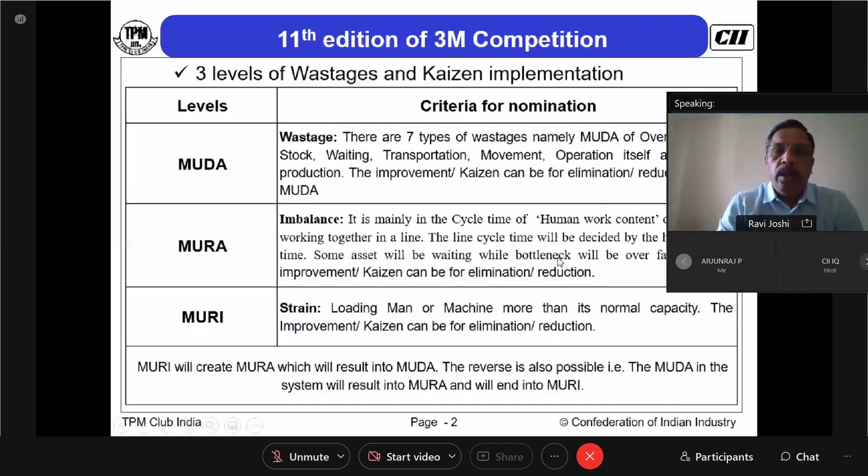As you all know, these are the three levels of the 3M, that is Muda, Mura, and Muri. The definitions of each, I need not read out because I know you are well prepared and have come across them already.

The seven types of Muda will add a lot of value to any industry. Mura looks into the incredible way of trying to balance things. Muri is going to really help the man and the machine eliminate unwanted things.

With this brief description of the three M's, I'm sure that by the end of the first and second day, lot many new definitions and meanings will get added through this presentation, through two days of interaction by various industries. Let's wait and look at how each one of us defines these and takes the journey in our industries.

Coming to the competition, we have totally 66 teams that are going to participate. It's important for you to perform well in the coming two days because it's a tough competition in each category. Under Muda we have 31 teams, under Mura we have 7 teams, and under Muri we have 24 teams.

The IT sector, which has been very competitive, supportive, and involved in these things over the last one and a half years, has seen instant growth in entries into the Kaizen competitions, circle competitions, and 3M competitions. This also tells us that the IT sector and service sector are looking at how to implement these technical tools in their organizations to improve and eliminate the unwanted.

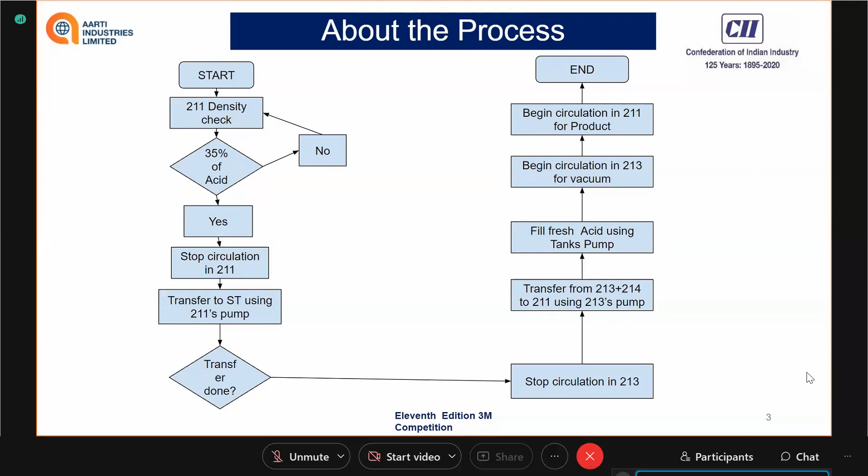Gases are scrubbed from 211 to 214 in series. Two times of transferring is done from 212 to 211 after emptying 211 into the storage tank. After transferring 212 to 211, we do not transfer it a third time due to our observation that nitric impurities in the gases remain unscrubbed and pass on to the further water scrubbers, which ruins our specification limits. The reason behind this high concentration in the water scrubber is saturation of liquid in 214. So we transferred 213 and 214 material to 211, due to which our vacuum got disrupted, resulting in a process downtime of 2 hours.

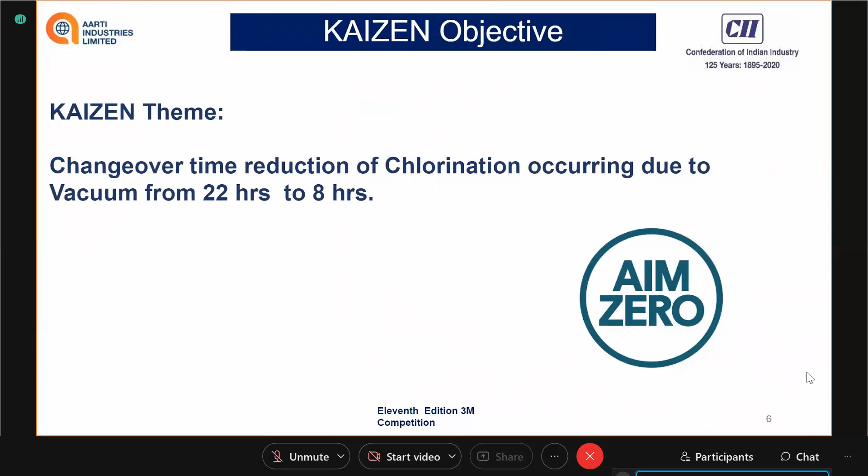From 22 hours monthly to 8 hours monthly, and we are aiming to make it 0. Our target timeline: our benchmark was 22 hours monthly downtime, and now our target is 8 hours monthly downtime reduction. Our team leader is Mr. Sanjay KP, myself as facilitator Shubham Chaturvedi, team members Mr. Gajanan Mugle, Mr. Sandeep K. Acharya, and Mr. Pulkit Narang. Our Kaizen start date was 22nd of March and Kaizen end date was 30th of September, with accomplishment of 2 trials.

Due to transferring of material from 212 twice, and 213 and 214 to 211 once - why? To avoid nitric formation in the scrubber by eliminating transfer from 214, as 214 is at the last stage of the process. So here we got the root cause, by doing the 5 Why analysis, that 214 gets saturated.

This is due to the process performed at earlier 2 stages due to the circulations. So we did brainstorming with the team and generated 4 ideas, out of which we opted for the second one.

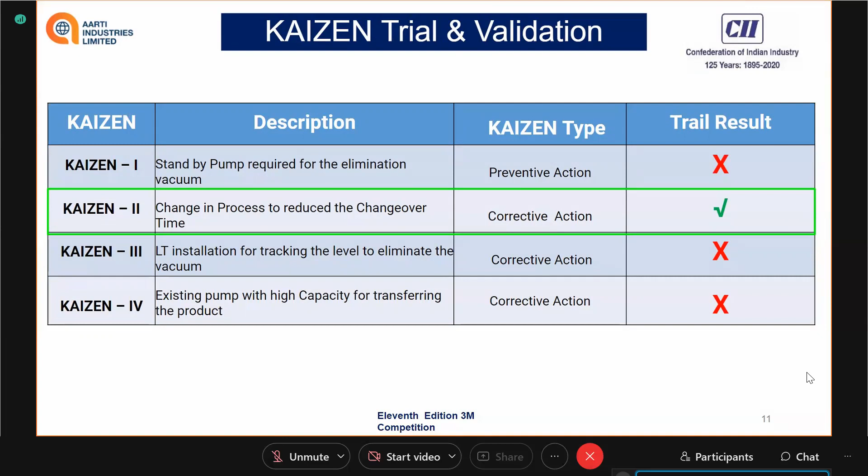Now we are transferring the product from 212 plus 214 to 211 seven times, and then from 213 to 211 once. Earlier we used to have a downtime after 3 product transfers, which we now get after 8 days. Meaning every 3 days we used to have 2 hours of downtime, and after implementation of Kaizen, now we have a downtime of 2 hours after 8 days.

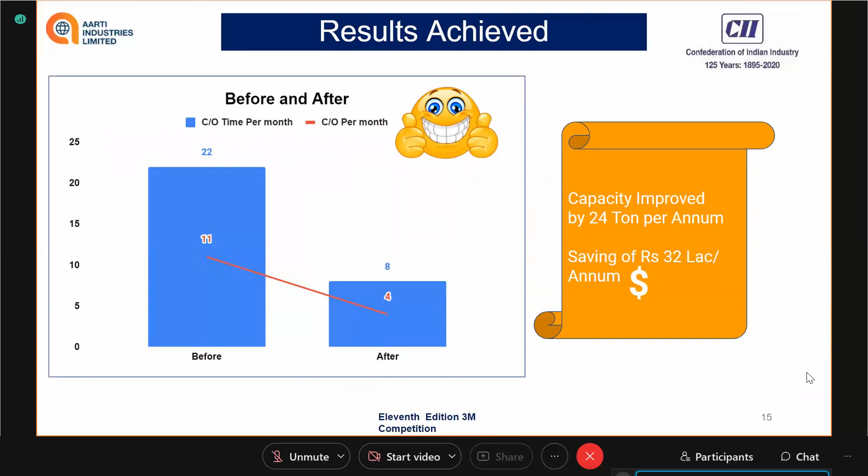Here you can see in the graph also - earlier we used to have a changeover frequency of 11. After implementation of Kaizen, now we have a changeover frequency of 4, contributing to 8 hours of downtime. In terms of monetary benefit, we have saved 32 lakhs rupees per annum, and our capacity enhanced as changeover downtime reduced from 22 hours monthly to 8 hours monthly, which is nearly 24 tons per annum.

Benefits in terms of PQCDSM: productivity increased by 24 tons per year, quality remains same, cost improved with 32 lakhs rupees saving per annum. Our delivery, measured by OTIF, improved as our capacity enhanced. Safety improved as changeover frequency reduced, and since we handle harmful chemicals, fewer touch points means more safety. Employee morale improved as their effort reduced due to changeover frequency reduction.

For sustainability, we have deployed a 1-point lesson, revised the SOP, and we are tracking in the log sheet and SAP data. But we are not able to disclose this because of the Aarti management system - we cannot reveal the product or documents on the common platform.

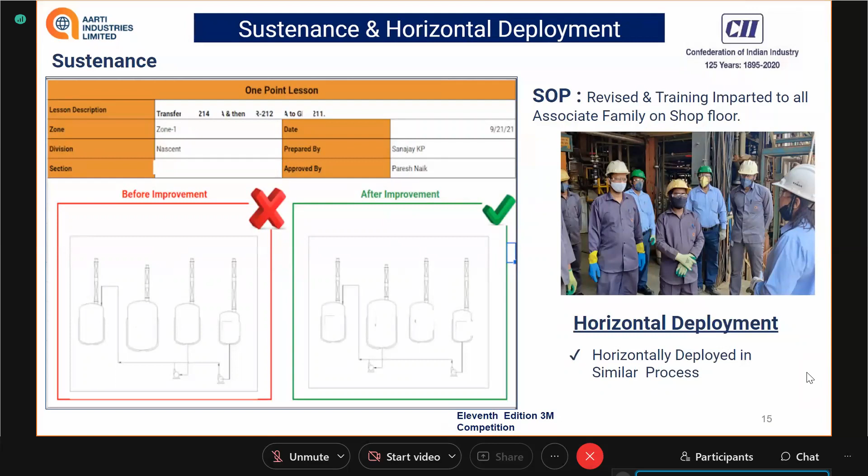Parallelly, we have horizontally deployed the same process in Zone 2 and Zone 3. In Zone 2 we have successfully accomplished the target, and in Zone 3 it is still going on. Here you can see the Kaizen sheet which we have submitted for participation.

There is a good saying by Mr. Taiichi Ohno: progress cannot be generated when we are satisfied with existing situations. So that's all from us. Welcome for the questions, thank you.

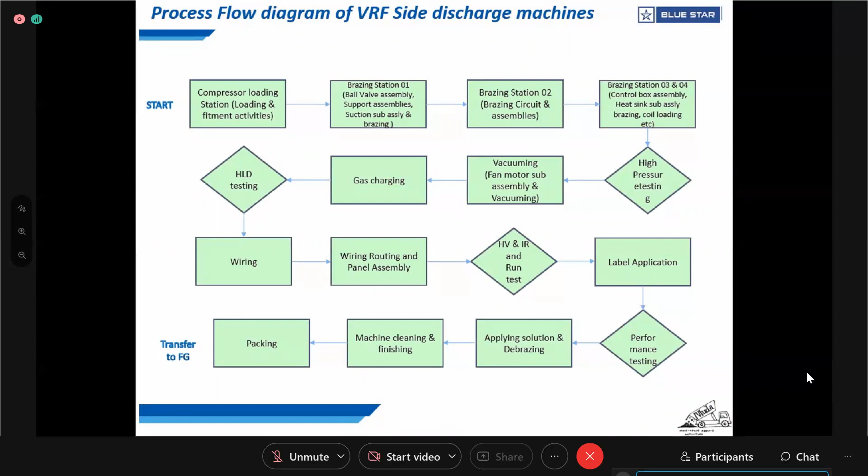Let's discuss the process flow of our product. It starts from machine chassis loading with a compressor at the loading station, then it goes to the brazing station where the HVAC components and related parts are brazed together in a closed circuit group. Next, it goes for leak test and gas charging, followed by wiring and safety test, and finally it completes with the final performance testing and packaging.

Let's discuss our case study. In Dadra plant, one of our assembly lines manufactures the VRF side discharge product, which can be seen here. We have capacity from 4 HP to 16 HP. It is a growing product in its category, and the demand is very high.

So it was very important for us to improve the cycle time and eliminate wastage from the assembly line. The main constraint we were getting from this product was delay in delivery, and because of that, higher SFGs and higher raw materials were getting piled up at assembly lines. We were also getting internal quality issues like wrong component fitment and wrong sticker fitment.

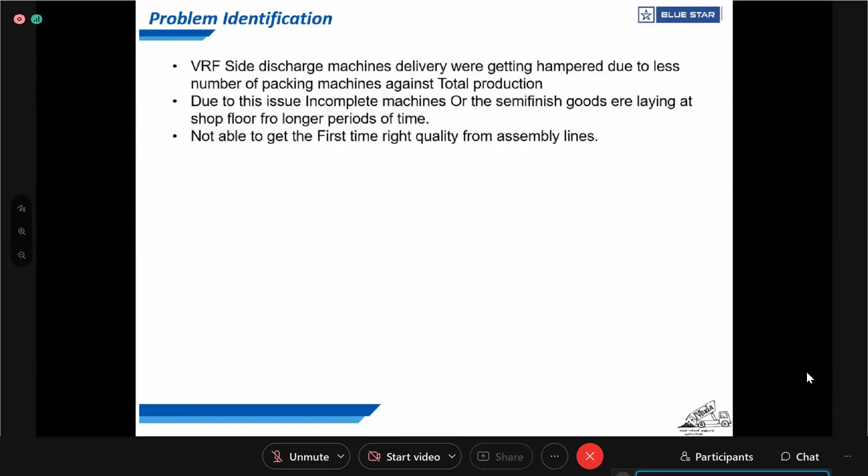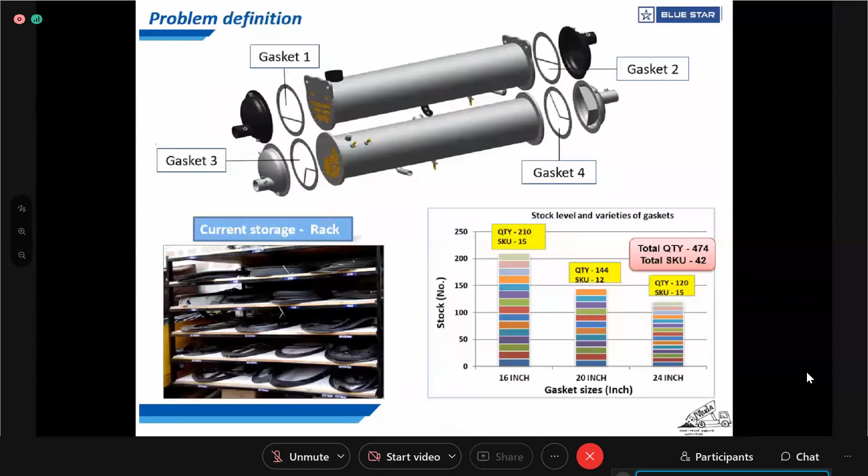The root cause analysis showed that this station needed a time study. So we did a time study on this particular station, and that gave us the opportunity to do Gemba and brainstorming at that station, and we found a few very good ideas about what we could do.

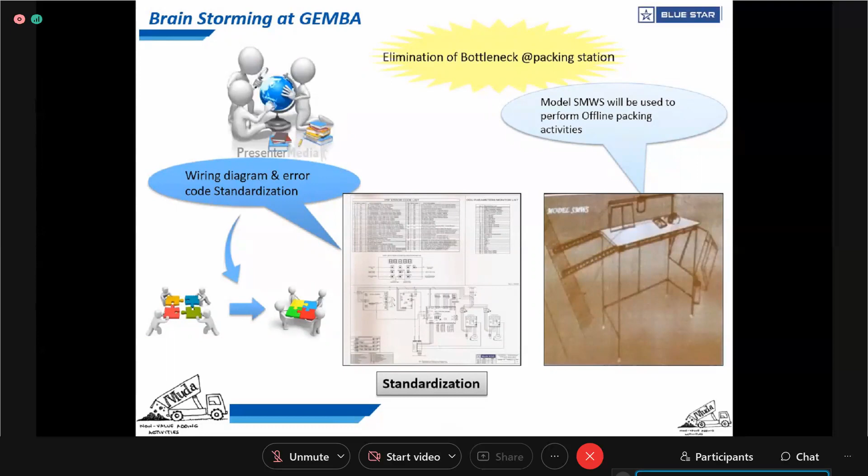We got a very good idea like standardization of stickers and wiring diagrams, and the SMWS concept, which is the major finding from this project. We were able to use this concept, which we learned from our industrial benchmarking visit at Paragon Industry, where they were suffering losses on their assembly lines and introduced the single man workstation. I will explain what it is.

In that particular station, a single operator will do all the offline activities and supply all the parts at the point of use. So in Blue Star, at the packing station, our operator started to complete all pre-SFGs and directly supply them to the packing station, so that the other activities could be catered to at that station.

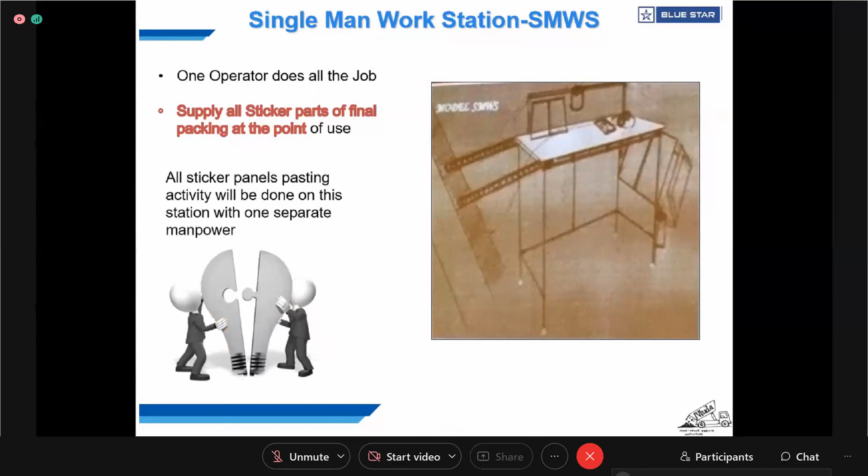Similarly, we also standardized the wiring diagram and error code. Earlier, we were receiving this diagram on 2-3 A3 papers, so we proposed a design change where these two stickers could be clubbed together. We got approval from the service team that they would not have any issue reading this diagram and error codes from a service point of view.

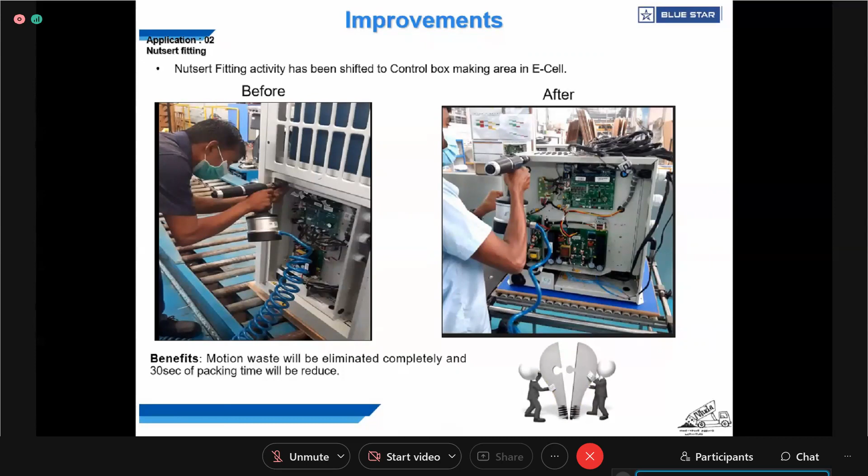We also saw that panel fitment activities were part of the packing station, so we shifted that nutsert fitting activity to the control box making area near the packing station in Blue Star. This shift saved around 30 seconds of packing time. This is one of our safest Kaizens, I would say.

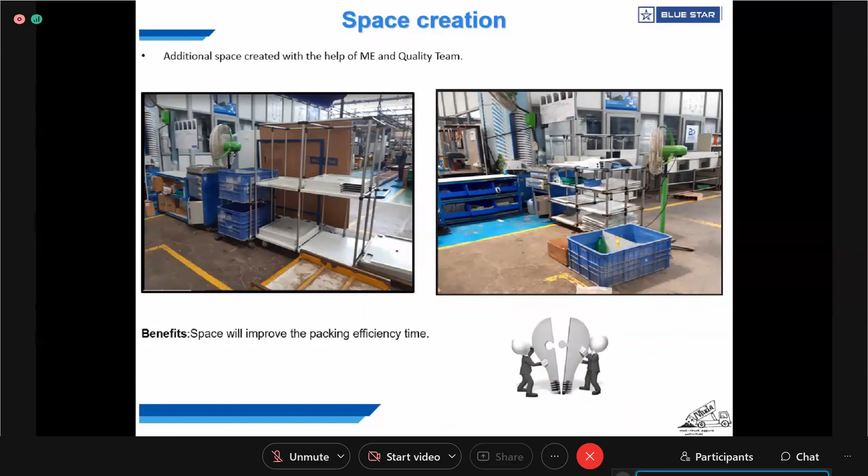After making all these improvements, we also saw that we no longer needed as much SFG WIP. So we were able to create some space, around 9 to 10 square meters of area, at that packing station.

At the end of the project, we can see the drastic improvement in cycle time of packaging station from 1591 to 975, which is around 61% improvement.

These are the tangible benefits of this project. We have improved our productivity by 40%. We have also saved the cost of 15 lakhs per month, which means we will be able to dispatch more machines, around 10 machines per shift. And the same way, we have standardized the wiring diagram error code on a one page, so that will also have some cost saving.

The process quality is also improved. Now critical to quality activities like pasting Blue Star company's logo and suction liquid stickers are handled by the offline operator, so he will have that much time to focus on quality. Labor cost has also reduced because now we don't need additional overtime hours to pack machines that were getting delayed. And morale has also increased because that single man workstation has balanced our assembly line.

Now whatever we are making at assembly line, we can get packed on that same day. So all the efforts were appreciated.

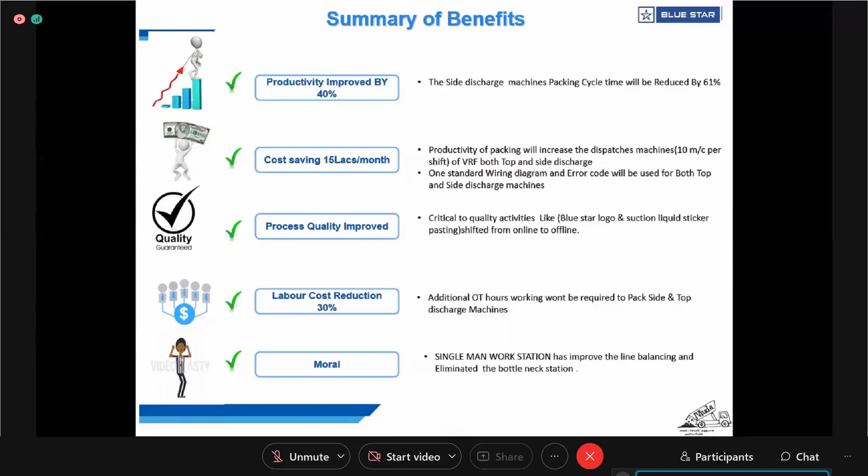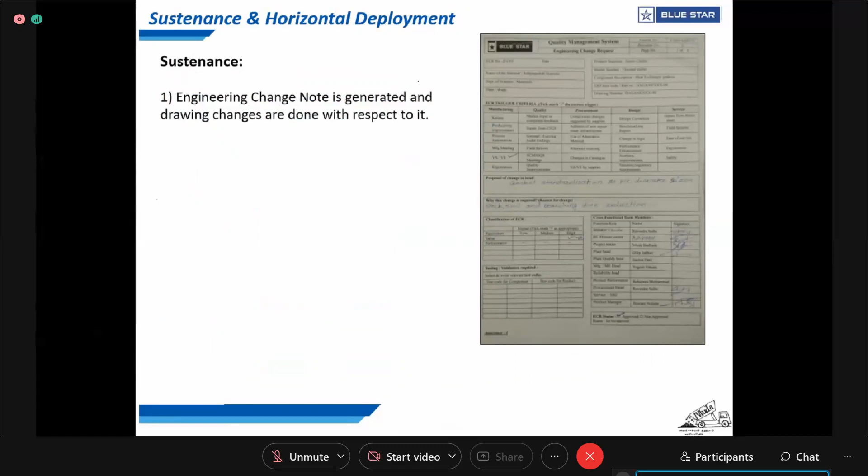On horizontal sustenance, we have also given an engineering change note for the process that we have changed. And on that horizontal, we have also initiated BOM changes for that error code wiring diagram thing. And on that horizontal deployment, for the same kind of product, VRF top discharge, we did this for side discharge.

We have implemented all the improvements at our similar product, the big brother of side discharge, VRF top discharge. Thank you.

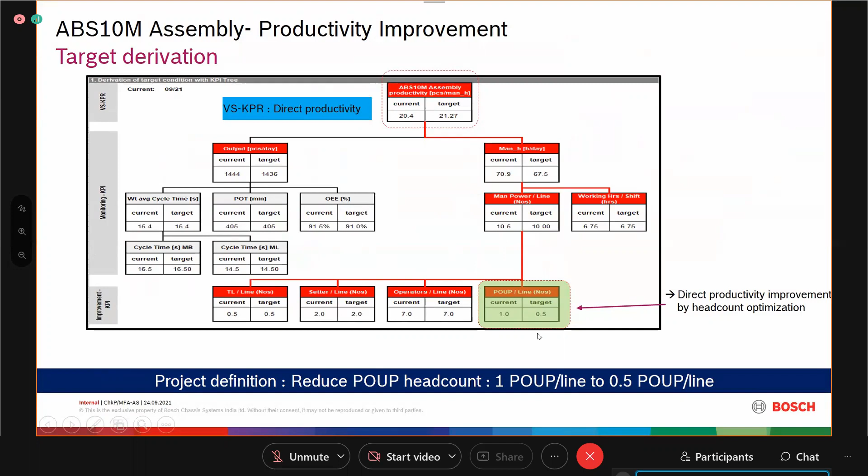So after analysis, we have identified one area that is the POUP, where we can improve because it is an offline activity. Currently, we were using 10.5 manpower on one line.

As I told about POP, first of all we will understand what is meant by POP. POUP is the point of use provider. It is a worker that supplies material to the exact point of use.

This is the current POP status. Currently, we are using one individual operator on every assembly line for material feeding. We have two assembly lines, so for those two lines we are using two different operators. The cycle time is 14.9 minutes for line 1 and 13.9 minutes for line 2, and the material coverage is around 15.5 minutes.

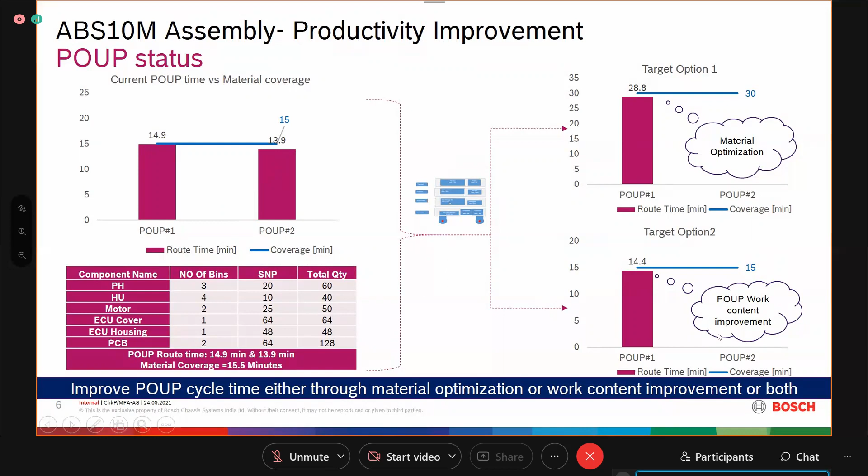For improvement in POUP cycle time, it can be achieved by either material optimization or POP work content improvement. After conducting a Gemba walk through the lines, we identified some areas for improvement, like POP route change, FG bin standard change, increase in SNPs per different bins, and POP trolley modification. These ideas are plotted on a prioritization matrix of yield versus effort, so we have categorized the ideas and taken necessary actions.

From here onwards, Vishal will continue.

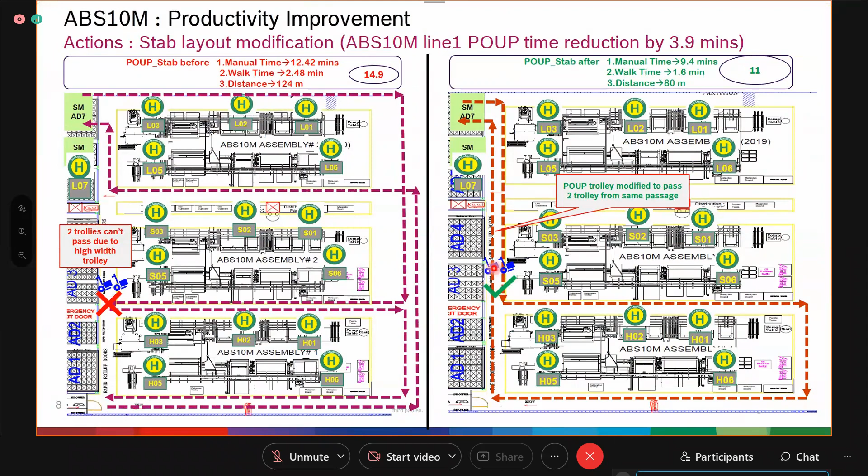So what changes did we make for these repetitive motions? Earlier, from this passage - this is the gangway - two trolleys couldn't pass through. So we modified the gangway on the right side, and modified the trolley so that two trolleys can now pass through this gangway. By this improvement, we reduced the cycle time by 3.9 minutes.

Second, this is the trolley. Earlier the width was 630 mm, and now we modified the trolley so the width is 550 mm. By these improvements, both trolleys are able to pass through the gangways.

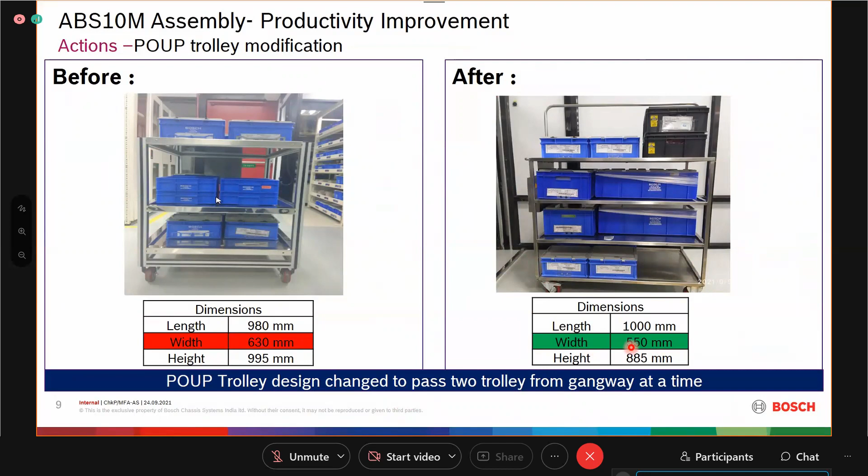Next, we changed the SNP of two high-frequency components for feeding. Earlier the SMP of the motor was 25, which we changed to 100. For the PCB, earlier SMP was 64, which we changed to 112. So for the motor we changed it 4 times, and for the PCB we doubled it. SNP is the standard number of parts in a bin.

By this, earlier the material coverage was 6.9 minutes, which we changed to 27.5 minutes. Now once we supply the materials, only after 27.5 minutes do we need to supply again. This is a drastic change in material feeding, reducing the material feeding frequency by 50%.

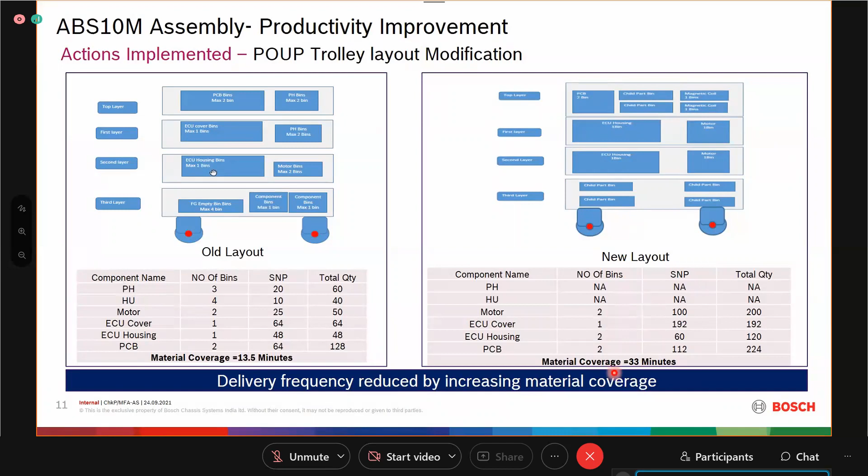Then we changed the trolley layout. Earlier the trolley layout was able to cover material for 13.5 minutes. We changed the trolley by optimizing a few components online and increasing the SMP quantities, so after trolley modification the material coverage is now 33 minutes.

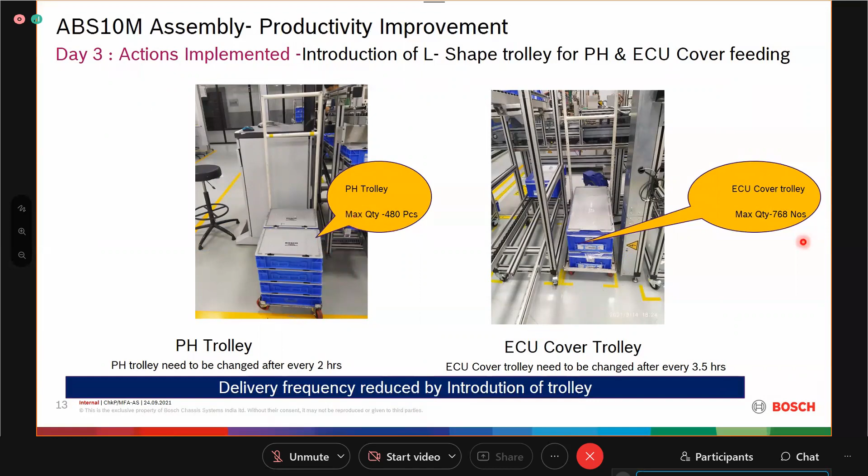Then we implemented a new concept: introducing the L-shaped trolley for standard kits, for pump housings and ECU covers. Both these trolleys were implemented to increase material feeding. With all these changes, one POP's cycle time is now 20 minutes, and he is able to supply the material in 20 minutes. With this, the material coverage is 24 minutes. He still has a 4-minute gap, so now the line is able to run for 24 minutes.

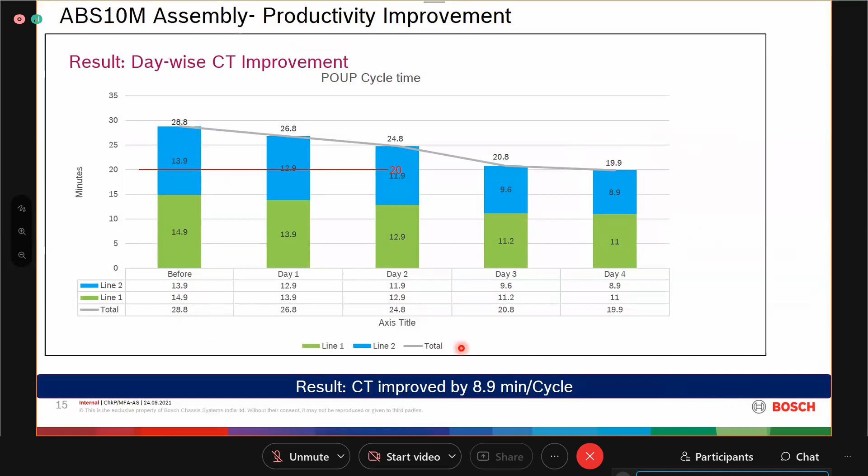This is the day-wise CT. Earlier the CT of POUP was 28.8 minutes, which we reduced to 19.9 minutes, showing improvement on a day-on-day basis. Earlier the POP productivity in pieces per man hour was 20.4, which we increased to 21.27 after these improvements. We also reduced manpower from 6 to 3, with 3 manpower now able to supply material for the same capacity. With this, we saved 5 lakhs annually, and this cost is also verified by the CTG.

We do have lessons learned: working in a CFT with a fresh eye and dedicated time is the key to rapid results even in challenging tasks. Improvement actions need not be massive - even small actions lead to huge improvements, and challenges bring opportunities.

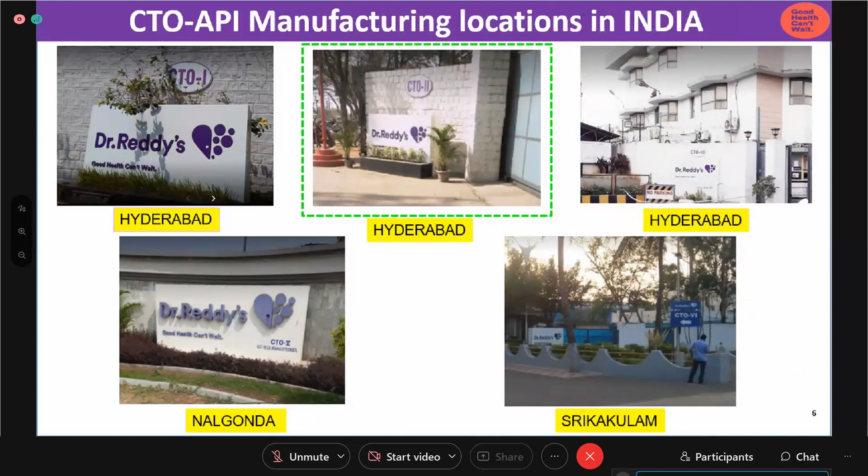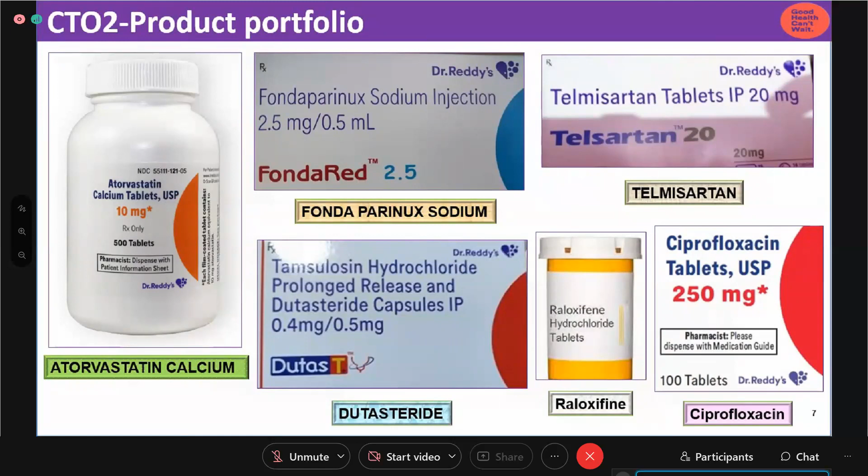This is our CTO2 product portfolio, where we are mainly into therapeutic drugs manufacturing, like atorvastatin calcium, fondaparinux, telmisartan, dutasteride, raloxifene, and ciprofloxacin, which are used mainly for decreasing blood pressure and reducing diabetes.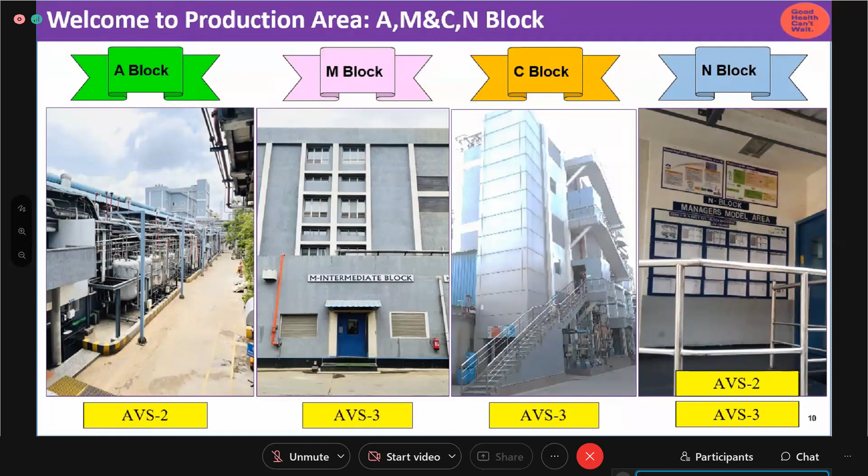Welcome to our production area: A block, M&C, and N block. AVS 2 is manufactured in A block, AVS 3 is manufactured in M&C, and both stages AVS 2 and AVS 3 are dried in N block.

This is our theme and target. Our 3M category comes under MUDA, and our Kaizen theme is productivity improvement in AVS stage by eliminating batch-to-batch cleaning activity. For our problem statement, for our atorvastatin calcium product, we are having a shortfall in meeting our customer demand due to less OEE. As per our OEE waterfall chart, in AVS 2 and AVS 3 equipment we have a major loss in batch-to-batch clean time, that is coming around 9% loss, equivalent to 70 hours per equipment in a month.

Team members are myself Manikanta, K. Srinivas Reddy, Sanjeev, Chandrasekhar, Chaitanya, and Mallikarjun Rao. Our cleaning occurrence target is current 30, and our target is to reach 3.

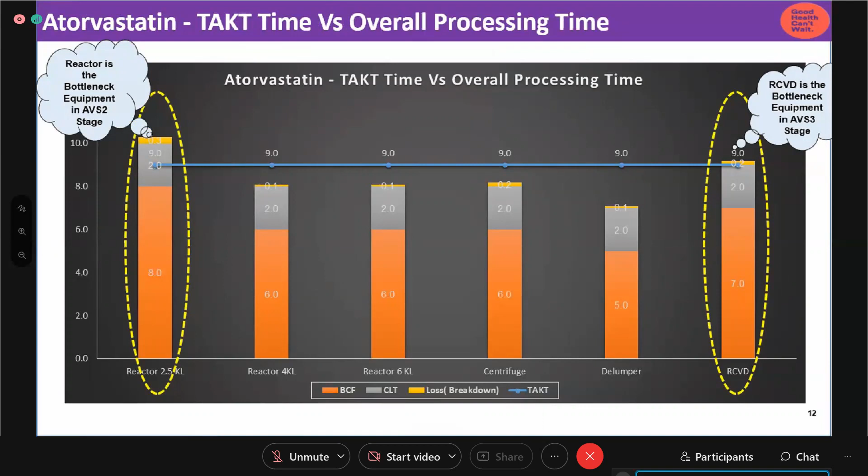If you see the AVS 2 process flow, it starts from charging reactor, goes to crystallizer, then to centrifuge and delumper. There is a respective time for cleaning each equipment batch to batch, and the quantity of methanol consumed for batch-to-batch cleaning is written below. The total time taken for cleaning all equipment per batch is 7 hours, and the quantity of methanol consumed is 450 liters per batch.

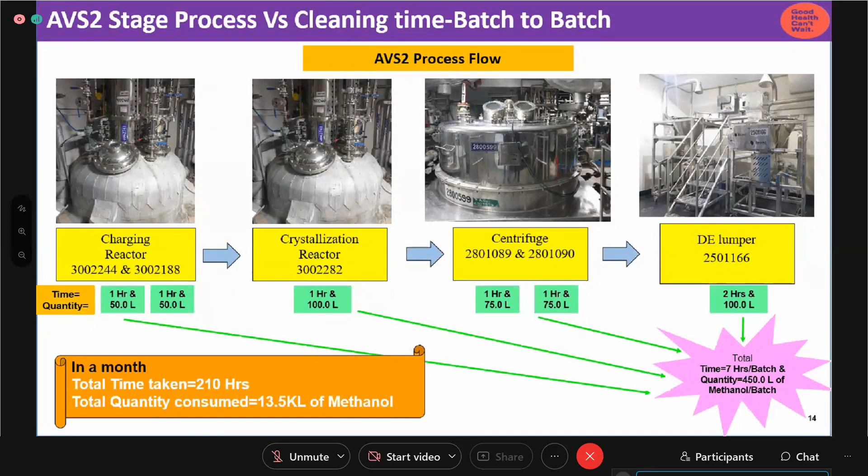In a month we are producing 30 batches, so total time taken is around 210 hours, and quantity consumed is 13.5 kL.

Same as AVS 2, in AVS 3 we have the same batch-to-batch clean time loss, coming around 9.7%. The process flow in AVS 3 flows from leaf filter to OLF, from OLF to reactor, reactor to centrifuge, from centrifuge to delumper, delumper to tray dryer, tray dryer to miller, and last it comes to RCVD.

You can see the respective time taken for cleaning each equipment batch to batch, and the quantity also mentioned below. The total time taken for cleaning all these equipment for 1 batch is 13 hours, and the quantity of methanol consumed is 700 liters. Total time taken in a month is 390 hours, and quantity consumed is 21 kL.

Consumption of both AVS 2 and AVS 3 in a month, total time taken for 12 equipment is 600 hours, and total methanol consumed is 34.5 kL. So I request my colleague to continue further.

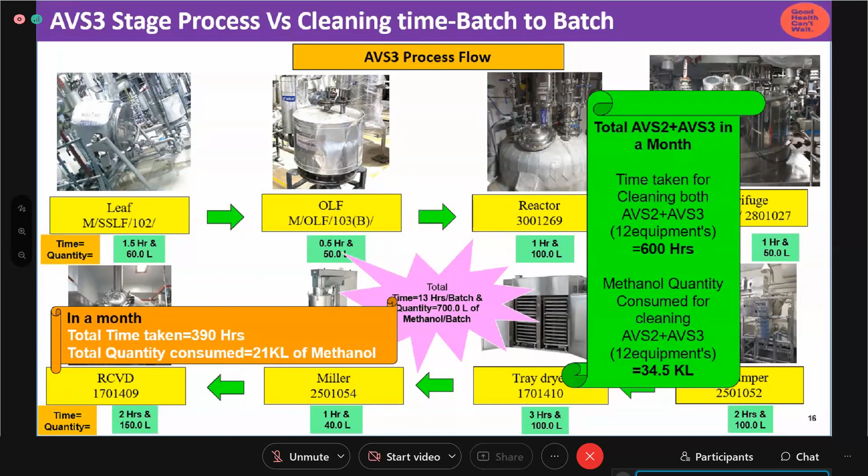So myself, Srinivas Reddy Kalam. So what we did, we just thought how to eliminate the skip cleaning, and we had a brainstorming along with our team, and we came up with a lot of possible and probable causes.

And then we validated all the causes, and we ended up with 6 causes: usage of more solvent for faster cleaning, extra manpower while cleaning, optimizing cleaning frequency, introduce spray ball for faster cleaning, introduce spray jet pump for cleaning, and cleaning with water instead of solvent.

We did a feasibility study as well as a cost impact study, because since this is pharma, making one small change leads to a big impact because it is impacting human life. So we did a feasibility study on cost impact, and we found that optimizing the cleaning frequency and introducing the spray ball are viable, having both cost impact and feasibility.

So we decided we'll go with these 2 improvements. If you see improvement 1, optimizing the cleaning frequency, this is the process step. When you are going to optimize or challenge the current process, we have to go for a protocol study, conduct the protocol test, validate the test, and convince the customer as well as the quality team before it is implemented on the shop floor.

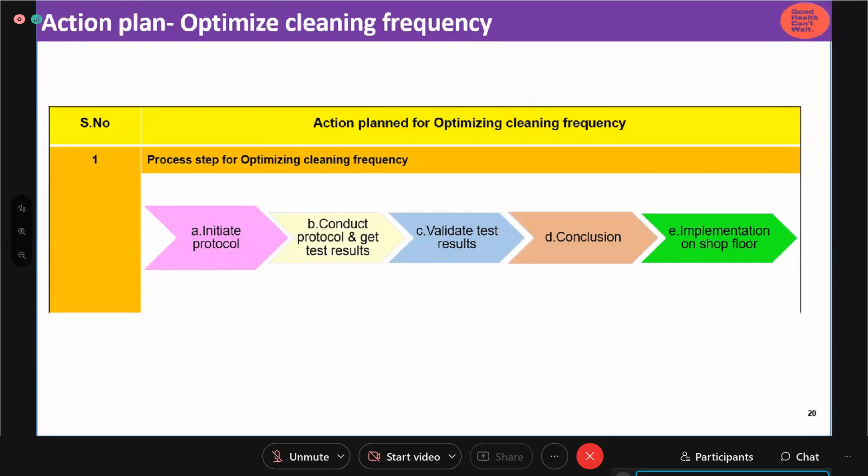So what we did, we took a protocol study. This is the protocol initiation for the skip cleaning activity. This is the study we conducted: initially we used to clean every batch, the machine had to stop and be cleaned, and whatever residual was inside the machine would be cleaned before we went for the next batch.

So what we thought was, since a similar product is running in that batch, we could go for skip cleaning. We took a trial for 5 batches, and we made an I-chart where we could see it is within the control limit. Even for 5 batches, it is within the control limit, and these two are input material AVS1 and C-964, and the second is the impurity part.

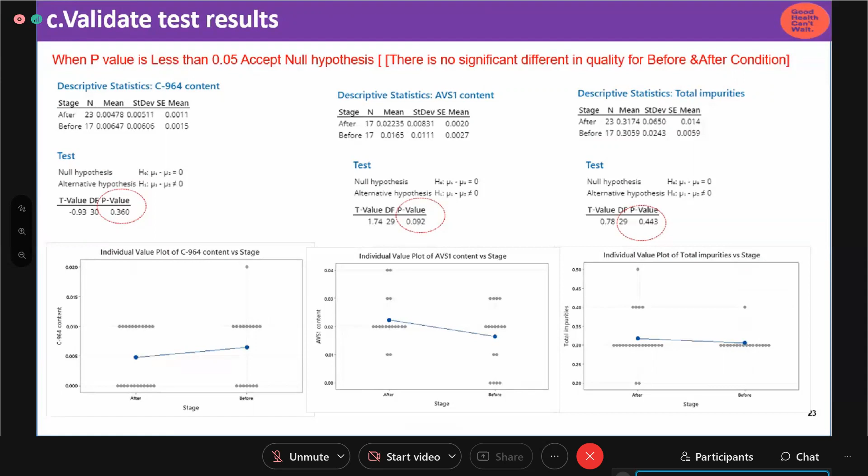Then we did a process capability study. Even the process capability is higher, like 13, 16, or 22. We thought there is no change in the variability of the output, so we concluded this is viable.

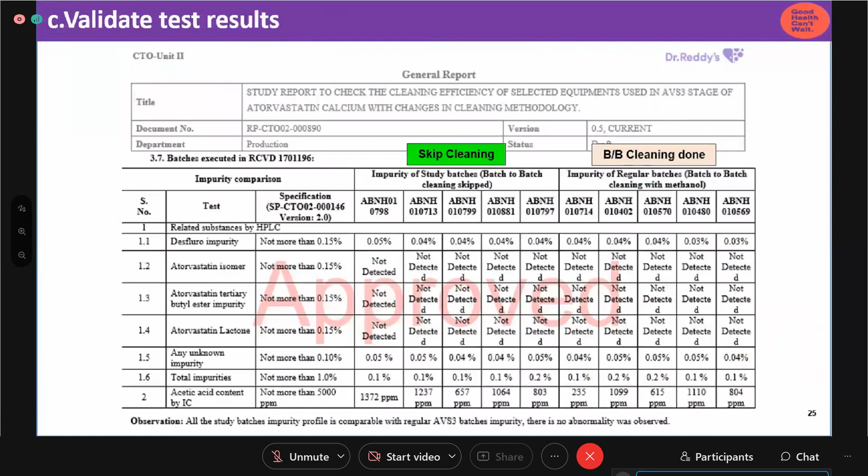And this is the report which we generated and produced to the quality team for validation. If you compare skip cleaning versus batch-to-batch cleaning before, they did a validation and approved this document, which was also submitted to the customer, and we got approval. And this is the case.

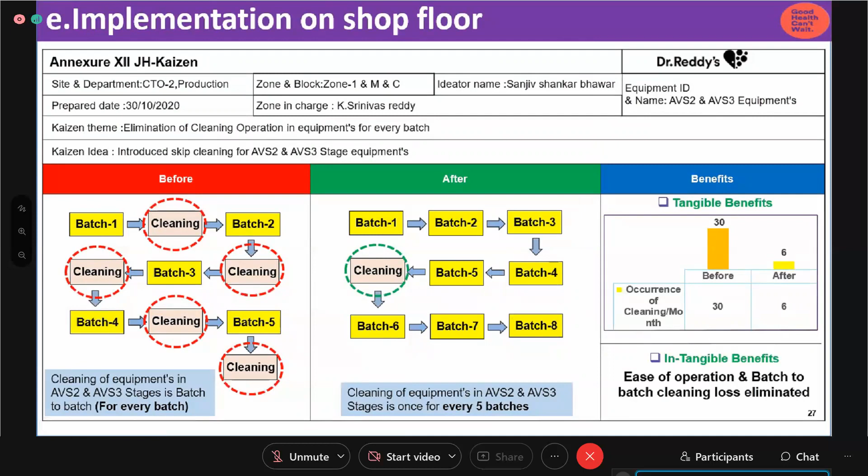Action plan 2 is introducing the spray ball. Initially people had to carry methanol manually; it was a completely manual activity with hazard involved, since at times it could catch fire. So we thought, why not make it a closed loop system? So we went for a spray ball, which is a completely closed loop system connected to the equipment.

It is connected to the line where the methanol is pumped, and people just have to operate the push button. It will spray around the equipment. It will rinse automatically, and it will get dry.

And the time saved, initially we took 120 minutes for cleaning the equipment. Now it has reduced to 60 minutes.

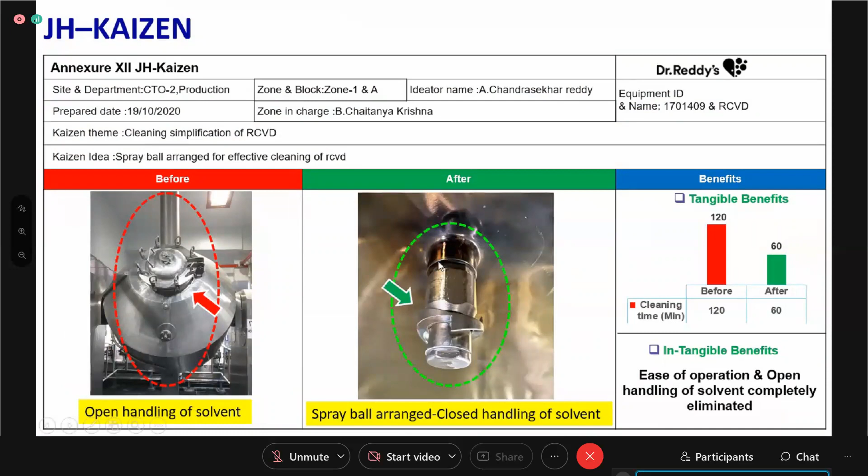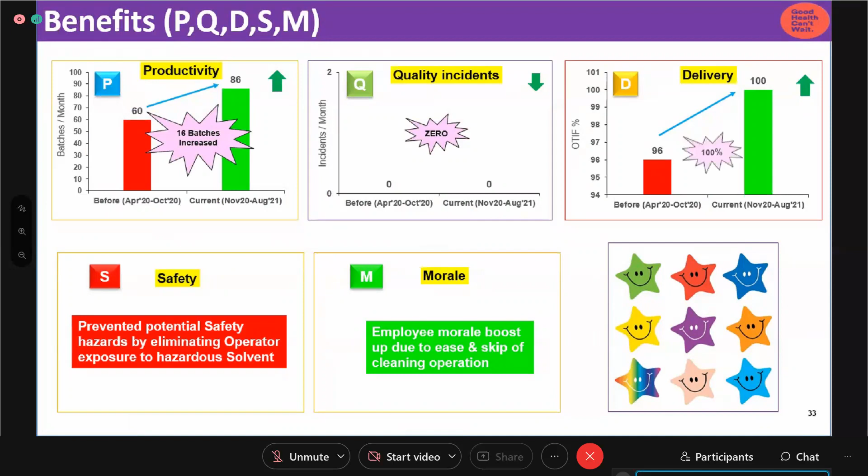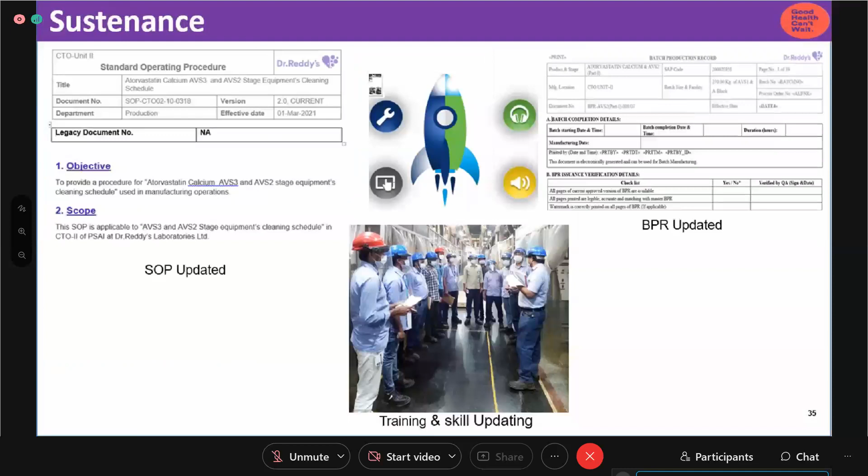And on the sustenance part, we have updated the SOP. And then we have updated the BPR also, the batch production record. And we have given training to the operator on the shop floor, and the skill matrix is updated.

Horizontal replication, we have planned for ATC2, ATC3, BAT 2, BAT 1, RAT 2, and RAT 3B, which is under progress. We are validating that process also.

And one more thing, if we implement this across all CTOs where there is a dedicated product, there is a potential saving of 100 crores per annum possible.

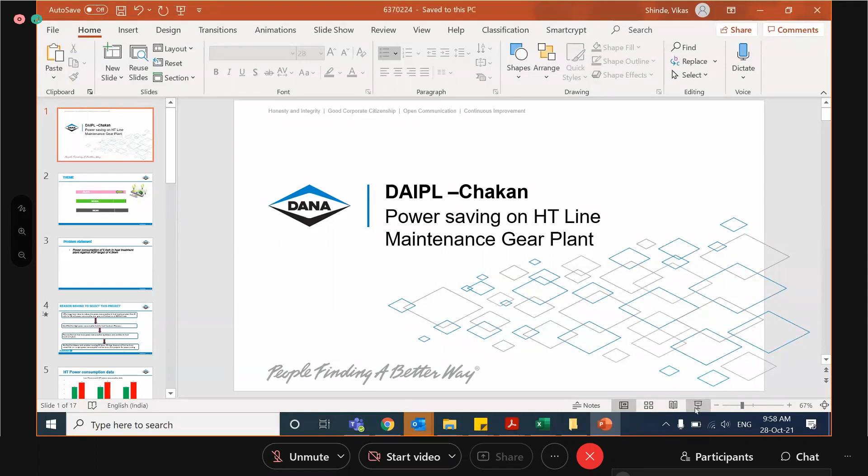Team Dana Anand. Mr. Vikas, are you there? Please unmute yourself. Yeah, we are there, team is there. Can you hear us? Yes, you are audible. Please share the PPT. Okay. So my screen is visible? Not yet, please. No, please. Yeah, now it is loading. Yes, now it has come. Okay. Please put it on slideshow mode. Yeah, right. Please, is it visible? Yeah, it's visible, but please close this presenter view, sir. Please click on the display setting on top left. Yeah, right. That will do. Duplicate side. Yes. Yeah. You may start, please.

Good morning, team. We are from DAIPL Chakan, and we are presenting on power saving on the HT line and maintenance gear plant. We have selected 3 themes, and out of these 3 themes, we are working on Muda. This is the problem statement: power consumption of 6 kilowatt in heat treatment plant against the IOP target of 4.5.

The reason behind selecting this project was the target taken to reduce the power consumption in the heat treatment plant from 6 units to 4.5 units per gear set, and we are now at 5.5 units. Then we identified the high power consumption load in the heat treatment process, and we found that more power is consumed by the blower and scrubber in the heat treatment plant. We found that the blower and scrubber run 24 hours into 30 days. Because of that, we selected this as a major power consumption area and started a project for power saving.

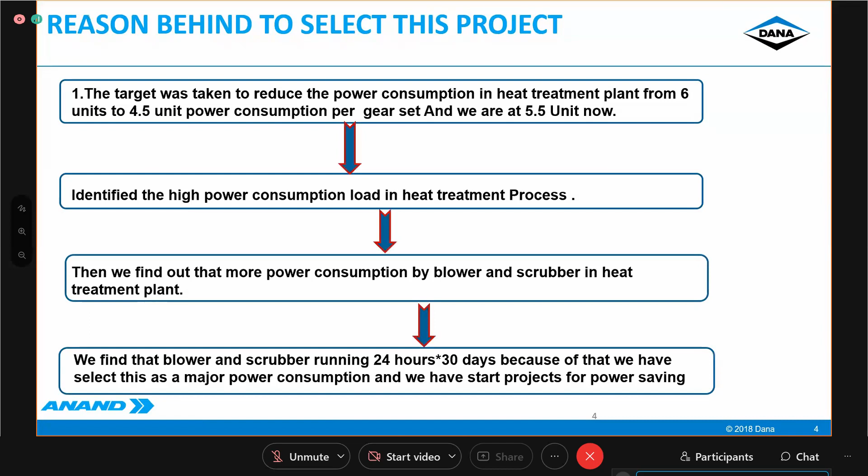This is the graphical representation of power consumption data. The target was 4.5, and in the last 3 months we achieved 5.5, 5.6, and 5.6.

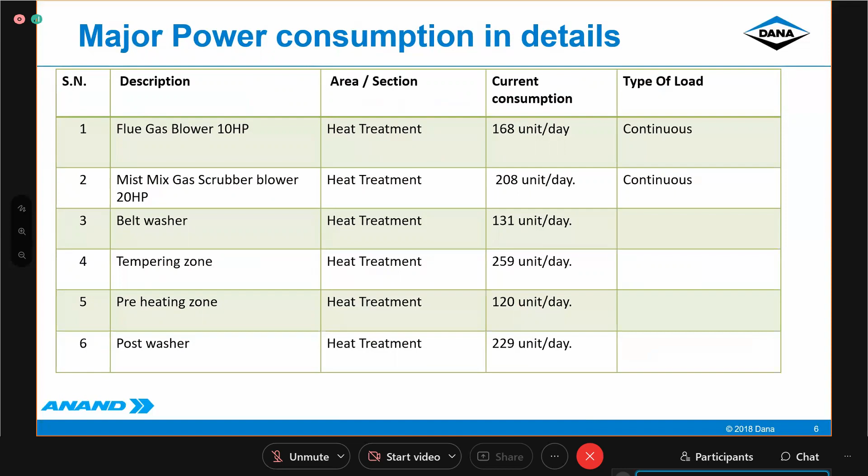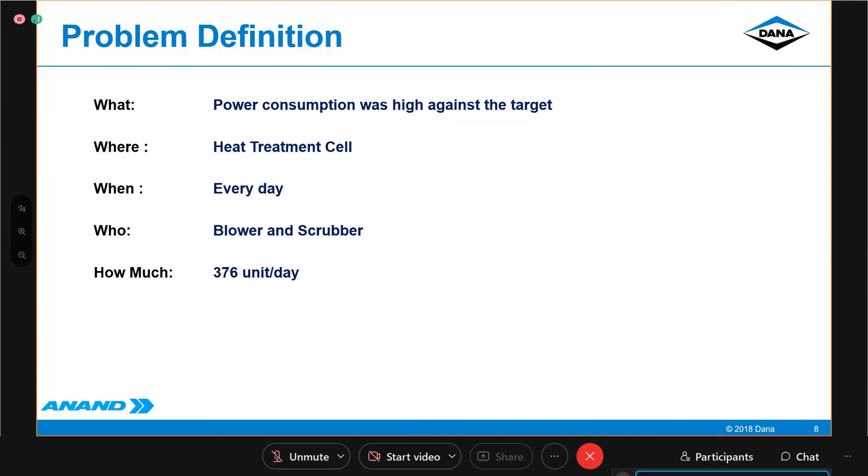This is the 4W1H format where we put our problem: power consumption was high against the target in the heat treatment line, and it was happening every day. The blower and scrubber had the more power consumption, 376 units per day. The status shows that more, about 160 units per day, power is consumed by the blower and 208 units per day by the scrubber. Both the blower and scrubber maintenance and service cost is more expensive.

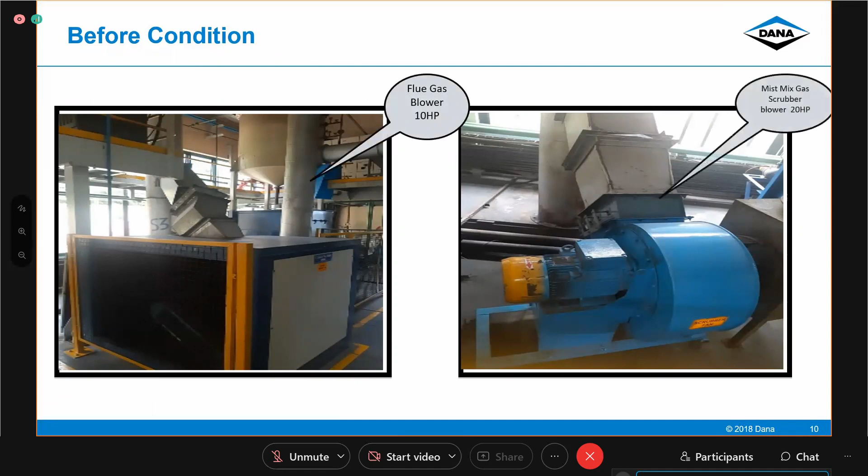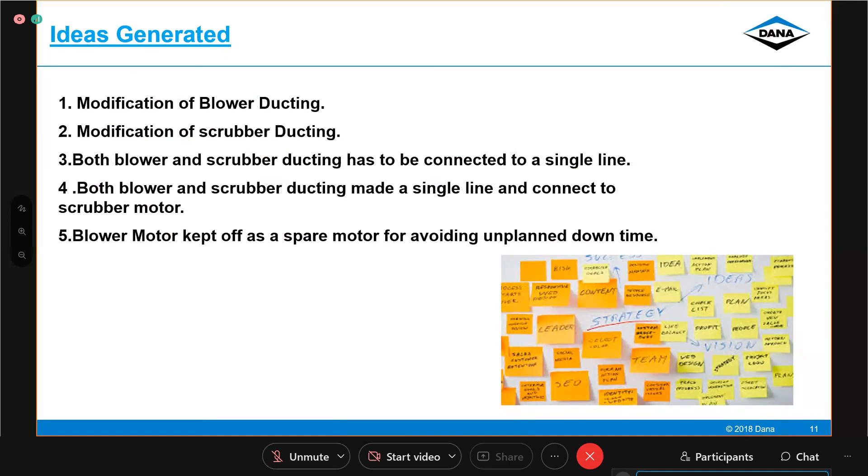The point idea was to generate modification of blower ducting and modification of scrubber ducting. Both blower and scrubber ducting has to be connected to a single line, made into a single line, and connected to a single scrubber motor. And the blower motor has to be kept idle for avoiding unplanned downtime in future. This is the idea we have implemented.

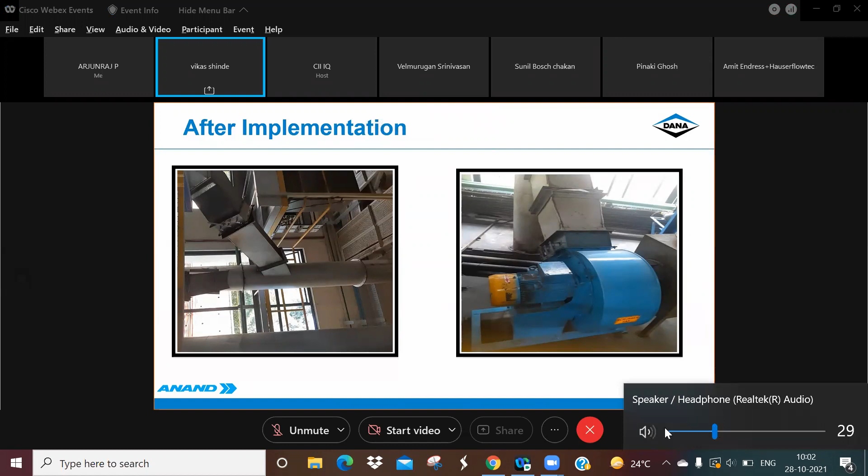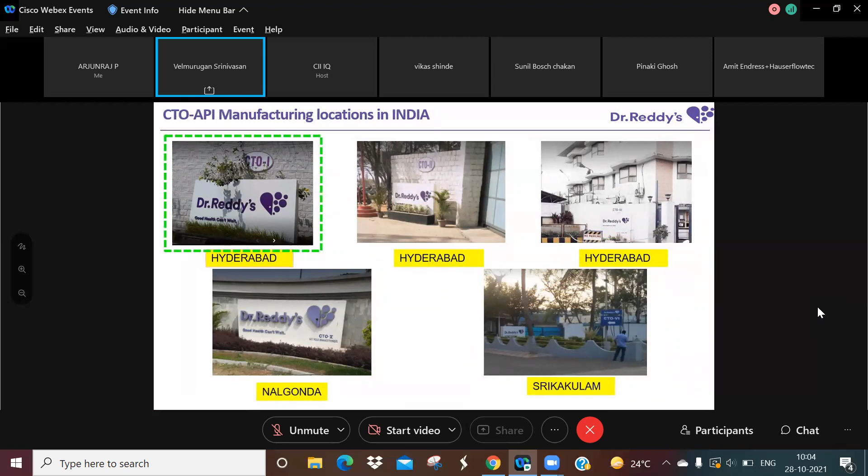For this, Dr. Reddy's is majorly focusing on pharmaceutical and API, global generics and proprietary products. Our core values are related to safety, quality, and productivity. We have around 29 global locations with 5 manufacturing locations globally. From India, we have 5 units related to API manufacturing.

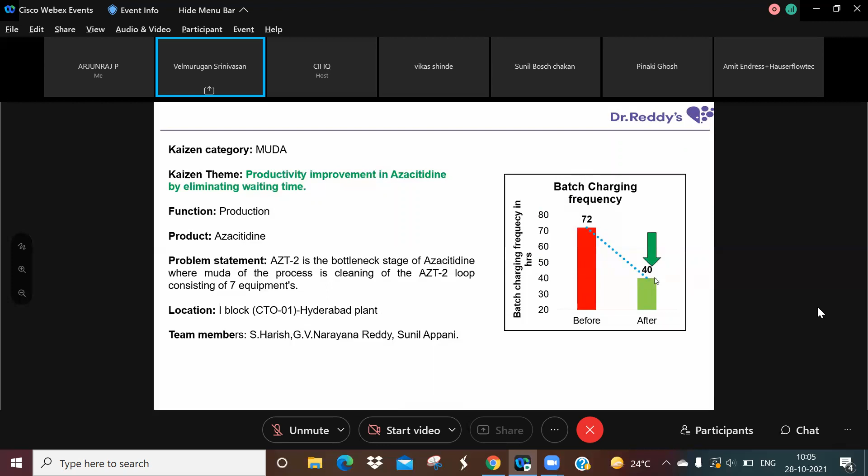The cleaning solvents also have contamination of cytotoxic products, so hence we need to detoxify by collecting all the mLs. We cannot avoid complete cleaning of the process, because whatever process byproducts are there in the reaction will kill the next batch. So hence cleaning is mandatory for this product.

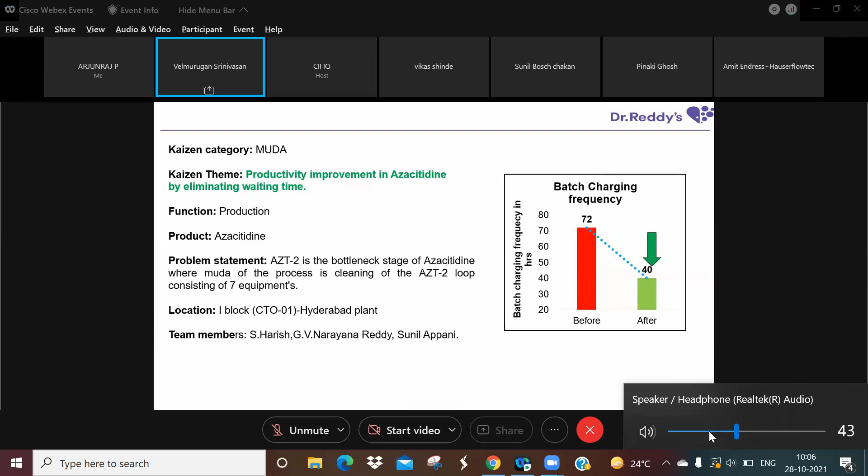Azacitidine is continuous; earlier we used to charge after 72 hours, now we made it a 40 hour batch charging frequency. Earlier we had 7 equipments; on completion of the 7 equipments we used to clean. The team members are myself, GV Narayana Reddy, and Sunil Appani.

After completion of this process it takes around 72 hours, 68 hours of process and 4 hours we can clean, because only after completion of unloading can the first equipment cleaning be done. Then from here it follows the same path for transfer, because I have to collect the cleaning mLs into a receiver, for which the detoxification activity has to be performed further.

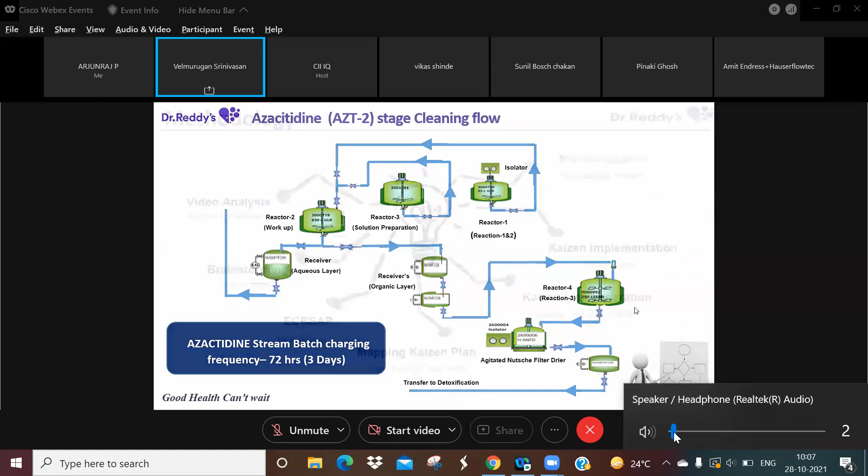So for this brainstorming study, we did video analysis, brainstorming, ECRSAP, and mapping Kaizen, Kaizen idea generation, Kaizen implementation, and finally this methodology.

From the video analysis, I could find that totally 108 operations are there. After completion of the 105th operation, this 106th cleaning operation I need to start, because after completion of the starting equipment to the mother liquor and cleaning solvent, I have to collect and do the detoxification.

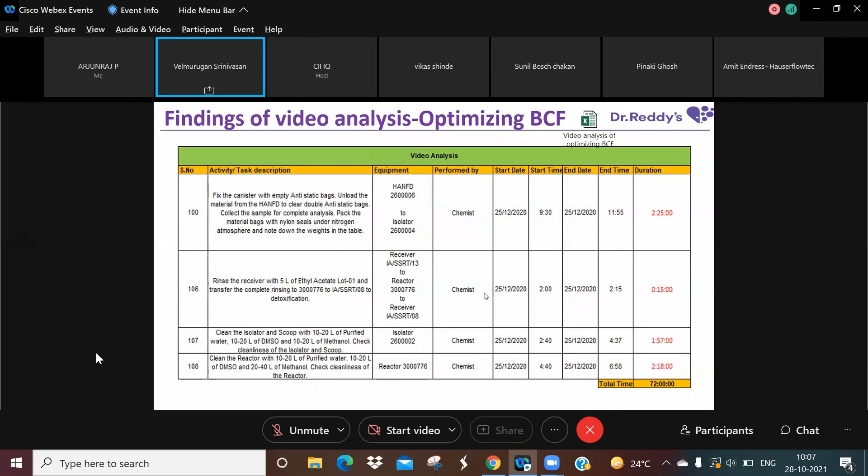So after completion of the process of 105 operations, covering cleaning operations 106, 107, 108, it takes 4 hours. So totally 72 hours only I could able to start the batch. So we did the brainstorming for optimizing the charging frequency.

Brainstorming different ideas, we generated and finally selected the fragmentation of the cleaning loop. After implementation of ECRSAP, the parallel activity was selected for 106, 107, 108 operations.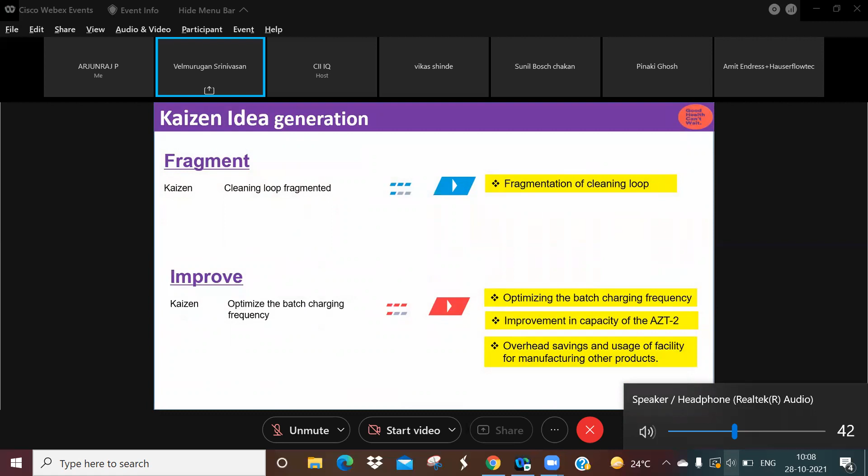So the Kaizen is fragmentation cleaning, and the benefits are optimizing the batch charging frequency, improving the capacity of the AZT-2, overhead savings, and the facility manufacturing other products at the same time. So these are finally the mapping of these two Kaizens.

We could see that now the charging goes from 776 here to 779. Here the workup will take place, organic layer will be separated. So instead of from entire cleaning completion till 106 operations, this is the 68th operation.

So we can differentiate the loop by the aqueous layer receiver. GLRT4 is there, and from here a parallel connection we gave. So once the process has entered into the second loop, the first loop cleaning parallelly we have to start. We started.

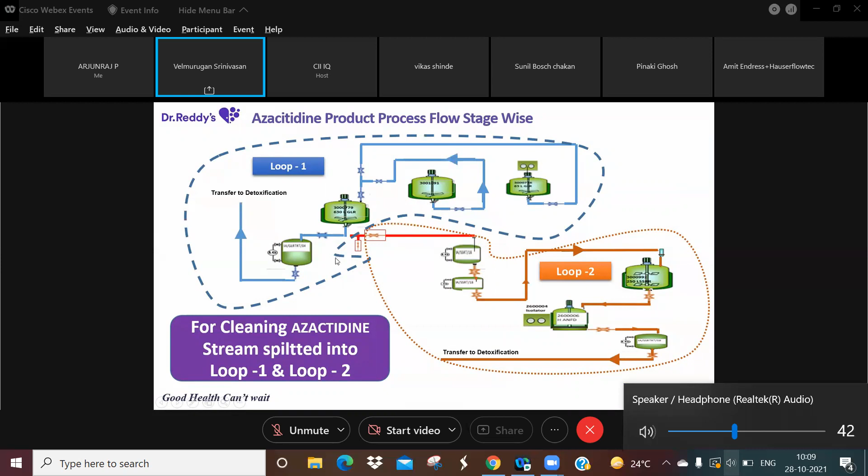We could see that before the completion of this loop cleaning, every solvent I have to collect in the final receiver. This has to be taken for around 72 hours to charge the next batch. Now we changed this loop system, and within 36 hours process plus 4 hours cleaning, 40 hours I could able to start the second batch.

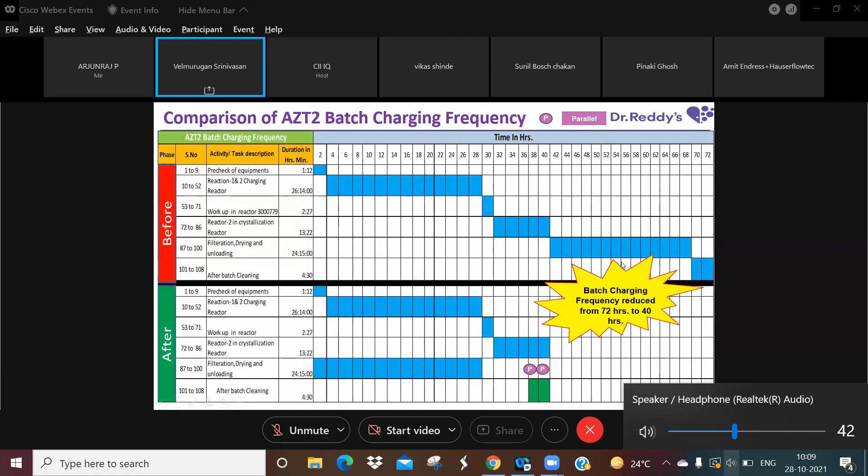So after 108 operations completion, I have to start the batch. It used to take 72 hours earlier. After implementing this parallel cleaning activity, I could able to complete and start the batch in only 40 hours. So these are the outcomes of this implementation of the Kaizen.

Earlier 72 hours batch charging, now 40 hours. Earlier I used to produce 27 kg of azacitidine at the AZT2 stage. Now I could able to produce 60 kg of AZT2, a 120% improvement as observed.

So with this, actually I used to produce 20 kg of pharma earlier, since the bottleneck stage was AZT2. Now I increased the capacity to 60 kg. From the 40 kg output I could complete within a short span of 4 months of time.

And the overheads which I used to have earlier were 3 crores, now reduced to 1.5 crores. The major benefit is that major muda in the process has been eliminated.

The cleaning parallel activity we made it, and the production demand shall be met within 4 months of time, and the facility shall be utilized for manufacturing other products, with utilization of manpower for manufacturing multi products in the same facility. The idle time of the equipment has been eliminated, and the equipment shall be utilized 100%.

At all times we could able to complete, the equipments are engaged. So at a time, instead of one batch, we are doubling the batch size. Earlier 27, now 60 kg capacity — 20 kg to 40 kg of capacity was increased.

And this is a unit 1 blockbuster molecule, where 120 crores of productivity we could able to deliver. So these are the sustenance projects, and change control is implemented, PPR is implemented, and training is given.

So thank you for the given opportunity, and any questions please.

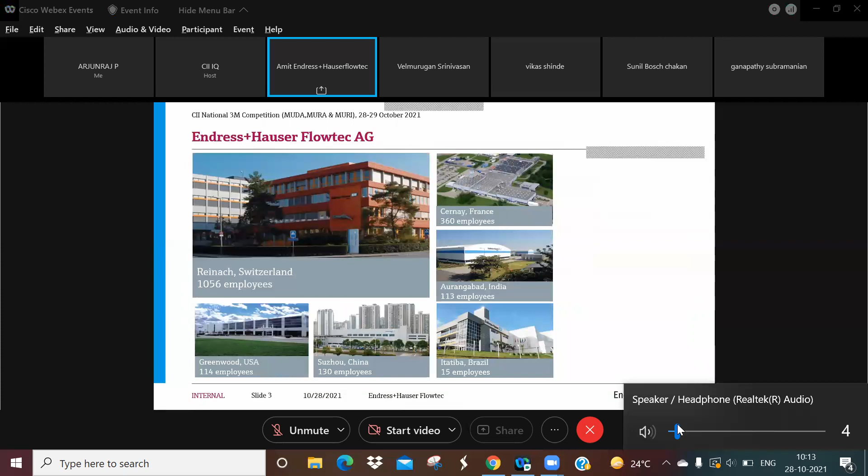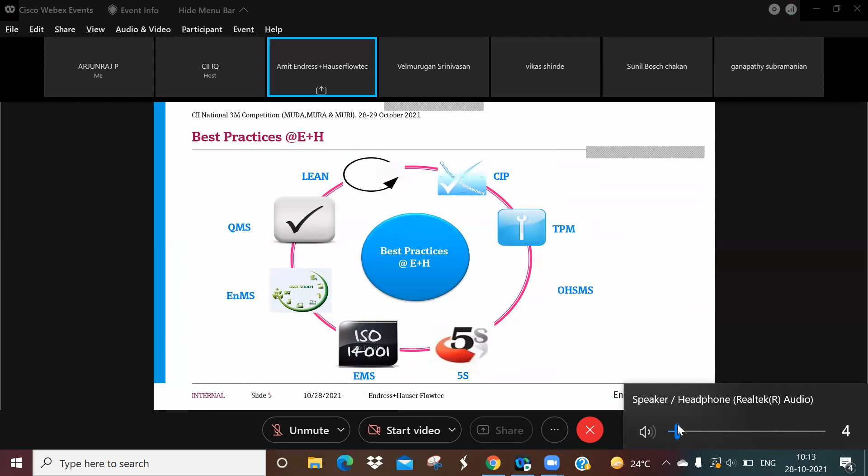We follow some best practices like CIP, continual improvement, TPM, then 5S, then we follow energy management, then QMS and lean manufacturing. We believe in following the best practices.

Our problem identification was: the supplier is not able to meet our delivery date for one of our parts, Housing G300, supplied by one of our suppliers situated in Malaysia.

So we follow the methodology. We have identified the problem, identified the process. Then we have investigated the problem. We use a process flow diagram. We use why-why analysis, then we brainstorm it, and then we identify the benefits and standardize it.

The problem description came during an annual meeting with the supplier. The supplier gave feedback that he has suffered while maintaining the delivery dates for Housing G300 parts, which is an aluminum die casting part. It takes more time for fettling, a secondary operation which is manual based, and due to the pandemic and lots of absenteeism, it affects him a lot.

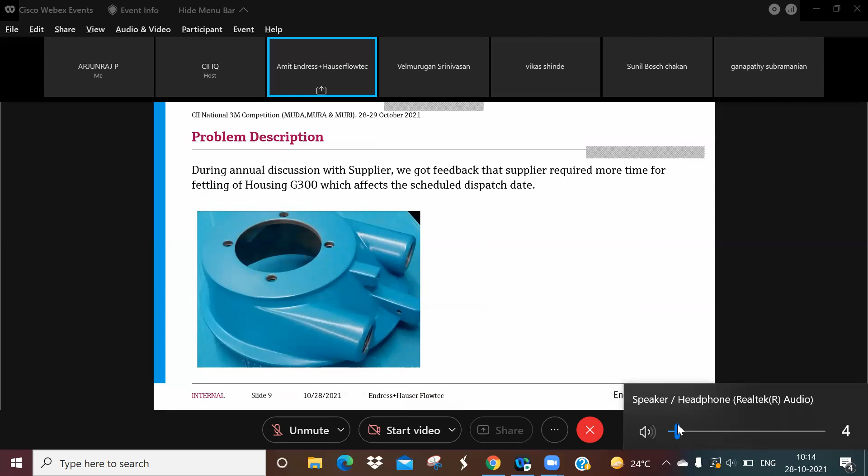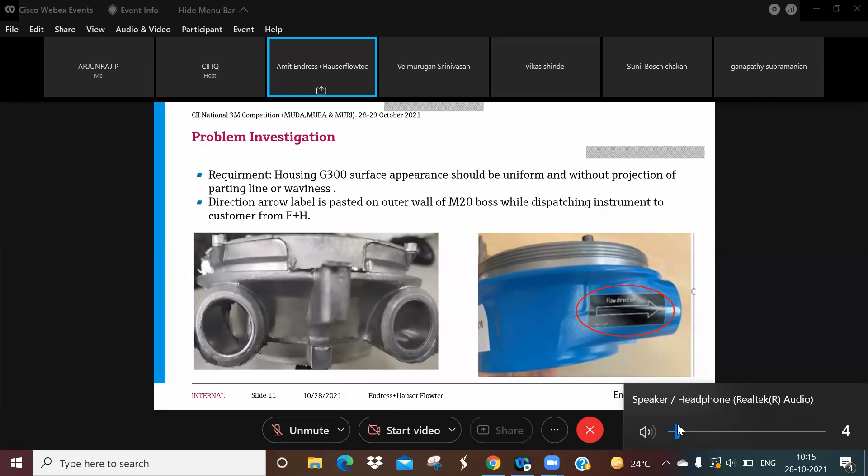The parting line has to be removed completely. As this part is manufactured by aluminum die casting, it's made up of 2 different halves, and the parting line is generated at the junction of the 2 halves. You can see it in the picture.

So as our requirement is to remove the complete parting line and make the surface appearance uniform, it takes more time for the supplier, as this area is difficult to access for tooling and it is a manual operation. It takes more time. Also, it has some waviness and gets rejections. They have around 1.5% rejection in fettling, and the production rate is quite low, at 13 parts per hour.

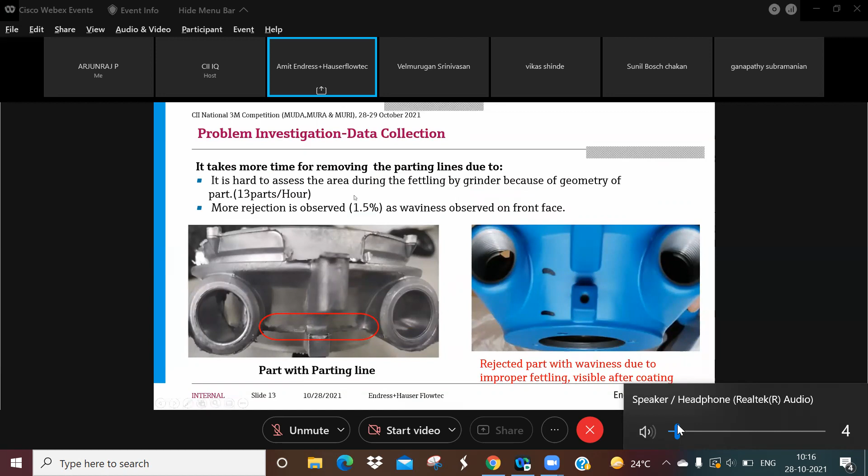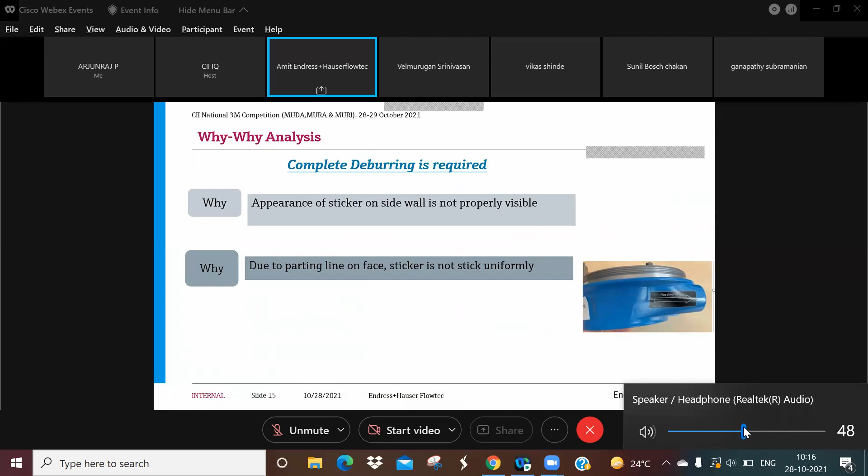So we do Why-Why analysis: why do we require complete deburring on this part? We apply one label which shows the direction of flow, and due to the parting line on the face, the sticker will not stick uniformly and it looks shabby. We identified the root cause as: due to the parting line on the side wall, sticker adhesion will be poor.

Then we brainstormed it along with the supplier, taking help from our R&D team and marketing team. Initially, we discussed with the supplier whether we could implement an automated process. We checked the feasibility, but due to the part geometry, automation was difficult and also required time and cost, so we decided not to implement that idea.

The second idea was whether we could reduce the parting line itself in die casting. We checked that feasibility also, but again, reducing this parting line may reduce the die life.